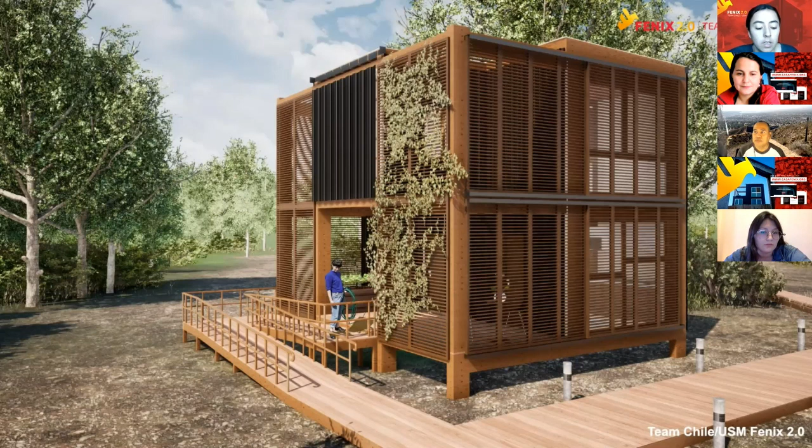Team Chile is participating with a project Casa Fénix 2.0, which is part of the Casa Fénix initiative that started in 2014. For this competition, our prototype is a single family unit of a mixed-use multifamily development. The resilience philosophy of our project adapts to respond to a post-disaster reconstruction after the devastating fire of December in

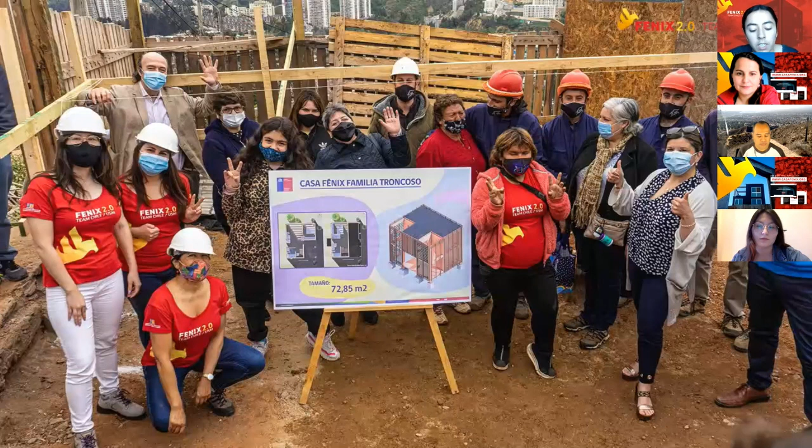2019 in Valparaíso, Chile. This version of Casa Fénix 2.0 will be the Uribe Troncoso family home as part of the reconstruction program of the Ministry of Housing and Urbanism, MINVU, through a subsidy. After trying several possibilities to situate the prototype, the latest action and decision of the allocation was taken in early 2020 when the COVID period started in Chile.

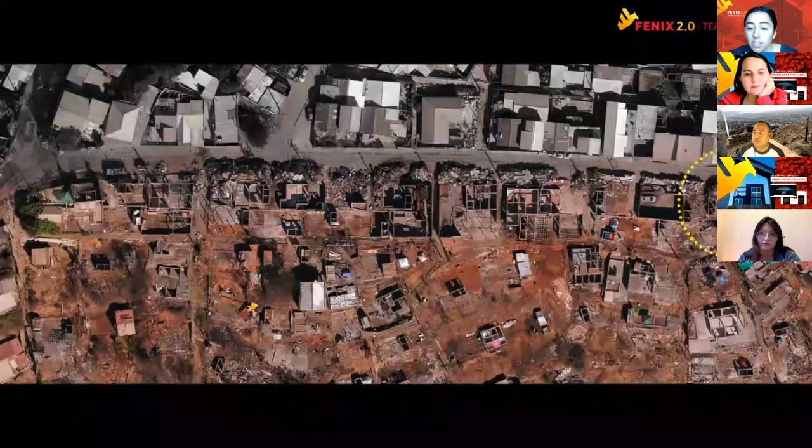For it, Team Chile and SERVIU analyzed the 245 families' profiles and property locations. We met some of the victims and decided to grant one family on the Rocuant Hill with the Casa Fénix 2.0. That is the first reconstruction subsidy after the fire.

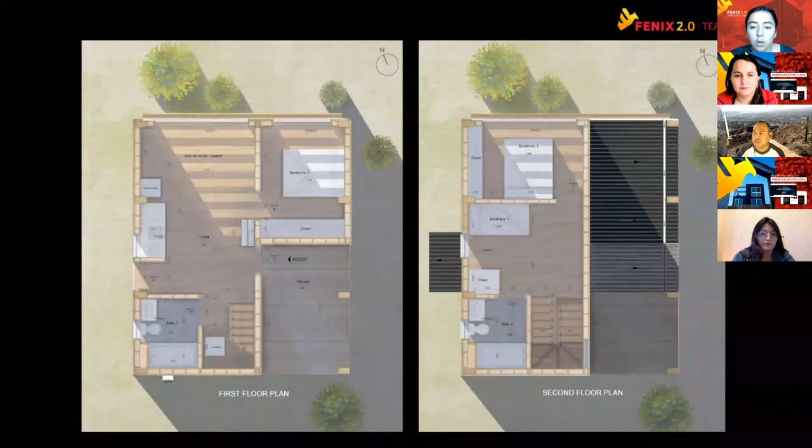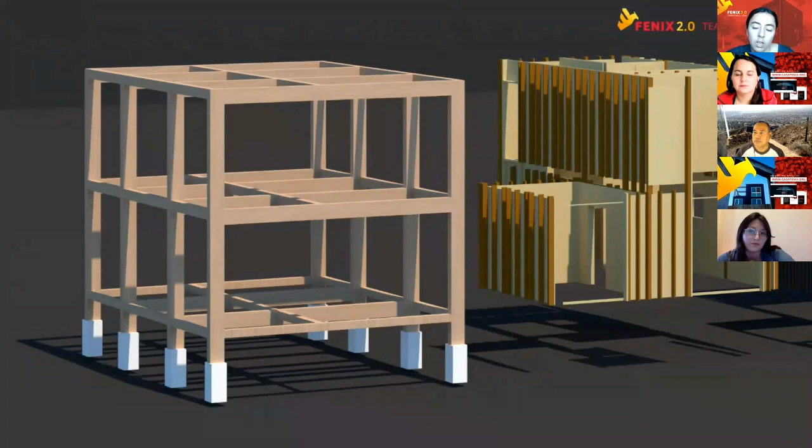The design philosophy and house design: Casa Fénix 2.0 program is able to adapt to different lifestyles and different stages of the occupant life cycle and be responsive to the natural obsolescences by changing over time. Our flexible design approach begins with the basic set of units of different areas which are enclosed in a regular structural grid. The project consisted of the building whose unit interior can be modified in their shape, surface, volume, solar orientation, natural ventilation, accessibility, function, and other qualities.

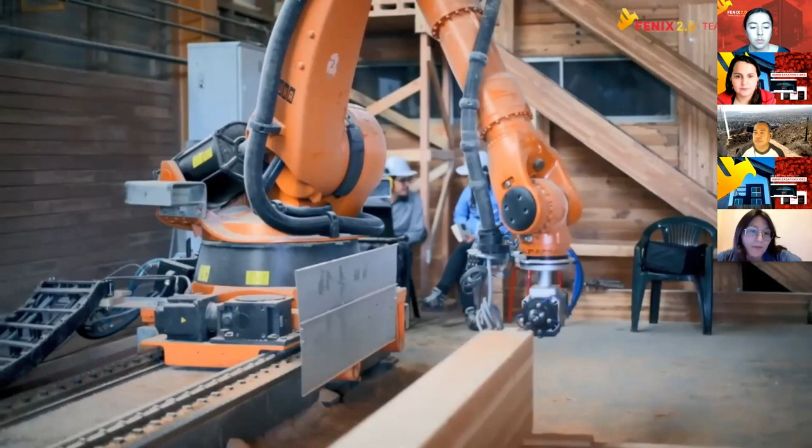All this through wooden frameworks and prefabricated panels which are manually removed and which don't compromise the integrity of the structure. The post and beam structural system for the building is based on engineered wood manufactured with a robotic process, this being an innovation for our country.

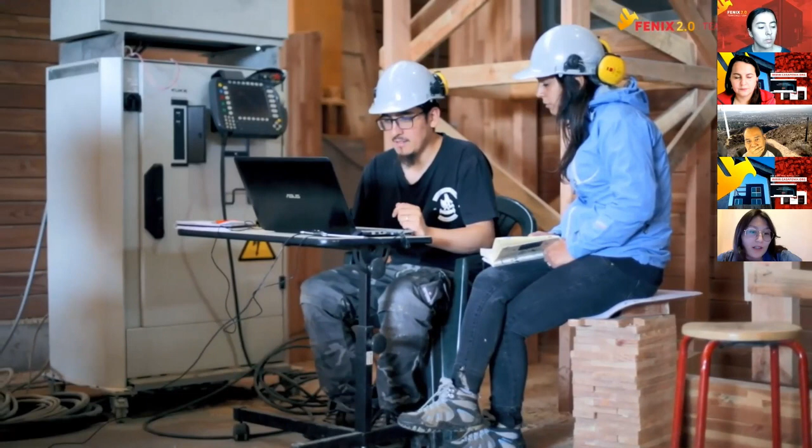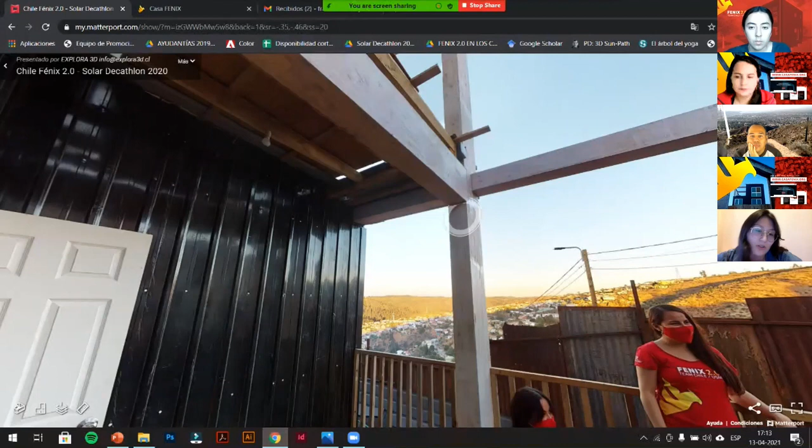The proposal used engineered wood and a structural approach based on robotic carpentry and complex geometry joints. The 5x5 wooden grid is industrially manufactured, composed of glulam timber with robotically carved out joints. We use the high precision and highly replicable approach of robotic manufacturing to promote the opportunities of wooden structures for a timber producer country.

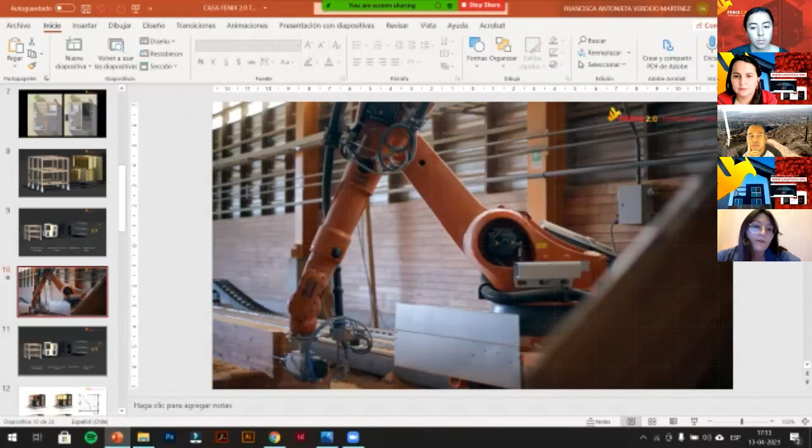The envelope is based on several layers of wood insulation, a ventilated facade, vapor, air, and water paper barriers for air tightness and humidity control, and interior layers to reduce the U value. The floor will also be finished with wooden laminate flooring to increase thermal inertia and decrease sound transmission. Each of these envelope and partition panels and the windows are modular, this being one of the most important industrialization features of our project.

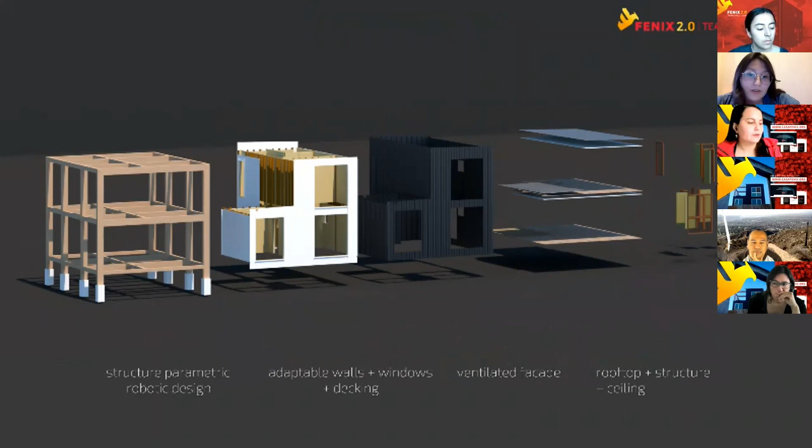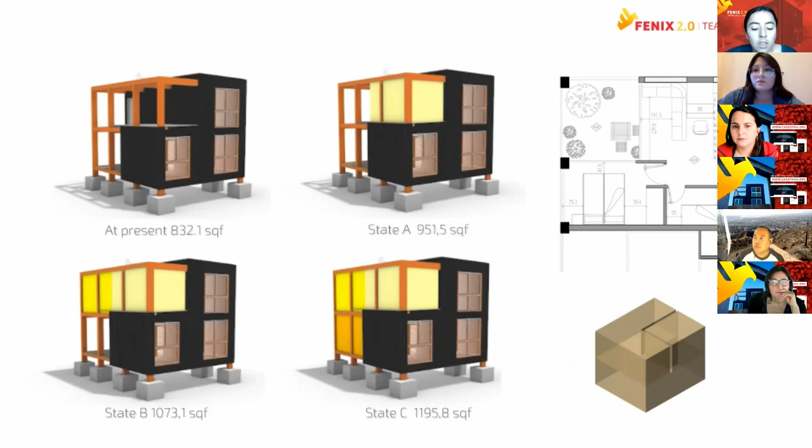The sustainable flex design: Casa Fenix 2.0 proposed flexible unit typologies according to the occupant's family composition. And this metamorphosis is manifested through the over-time transformation of the dwellings by means of flexible spaces that vary their shapes, orientation, and even their layouts by modifying the adjacent housing units. With simple geometry and simple zoning, the house is divided in 4 large zones.

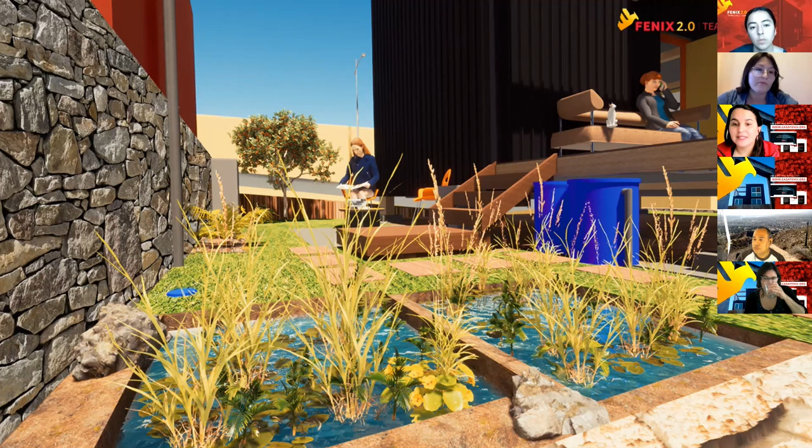As an innovative part, the house contemplates a water recycling and fire mitigation system called Fire Source. It consists of greywater and rainwater recycling connected to the sewage system with a solid, grease, and pollution particle filter, and including a natural cleaning treatment with plants, stored in a tank of 2,400 liters underground.

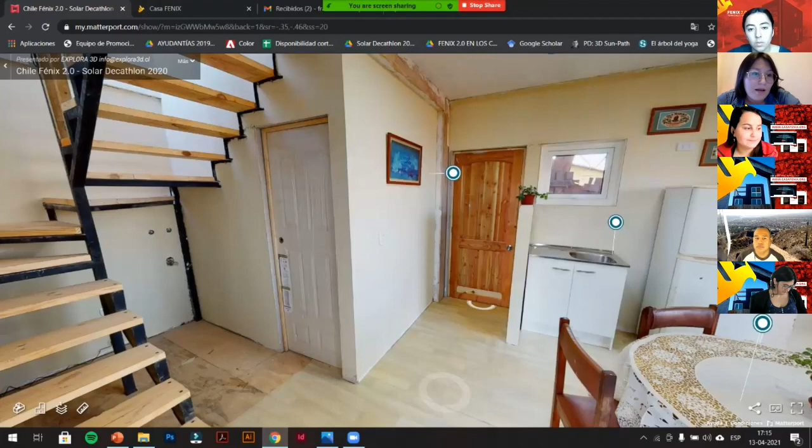And about sunlight and views, the main fenestrations with bigger surface of the house are made of double-paned windows facing north. They are soundproof and allow optimal conditions for thermal comfort and wind protection. Fixed shading devices are considered to prevent excessive solar radiation, with great sunlight exposure and a panoramic view of the Pacific Ocean and the hills of Valparaíso from any place of the house.

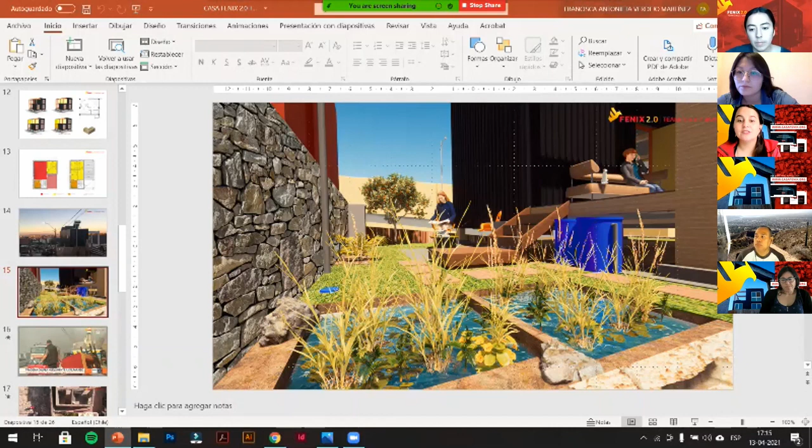Energy saving strategies. According to the actual location, Casa Fenix 2.0 being a social housing unit, the house contemplates a domestic solar hot water system with a thermosiphon solar system with electric backup, a government subsidy for social housing. The water capacity is 150 liters. Novel water treatment system for firefighting, which I presented before. It is the first time the system is going to be implemented in a house.

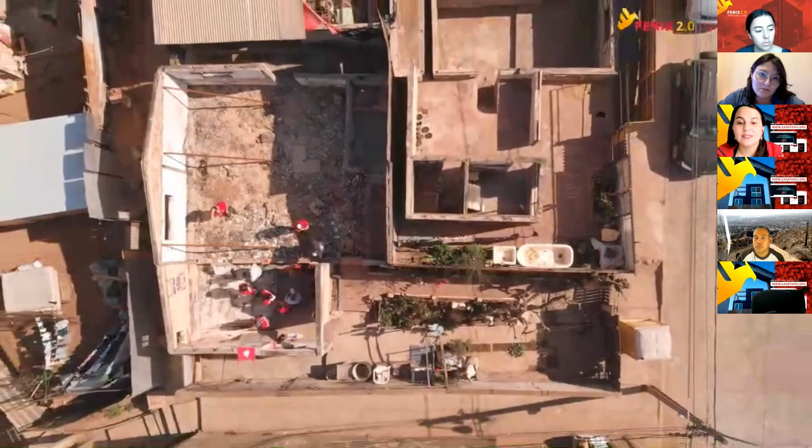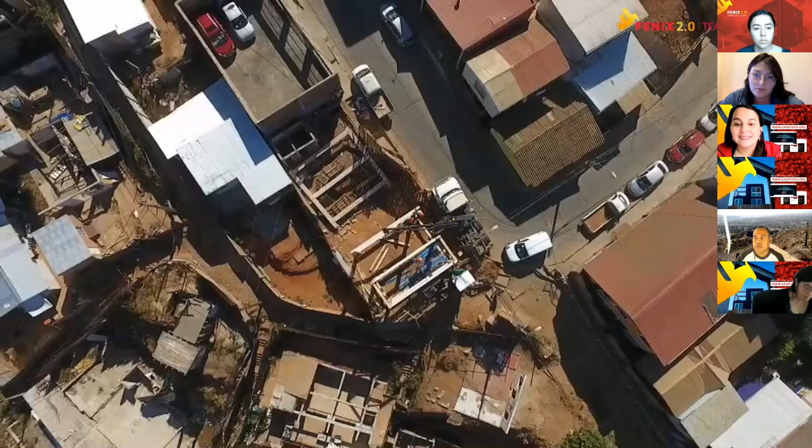This is very important because in recent decades, urban and forest fires in Chile have increased steadily. The largest number of burned hectares are concentrated in the central and southern areas of the country. We are in the central area. In Valparaíso, in April 2014, 9 of the 42 hills were quickly consumed by fire, being considered the largest disaster in the history of this region to date, burning a total of 3,000 homes and leaving 12,500 people homeless.